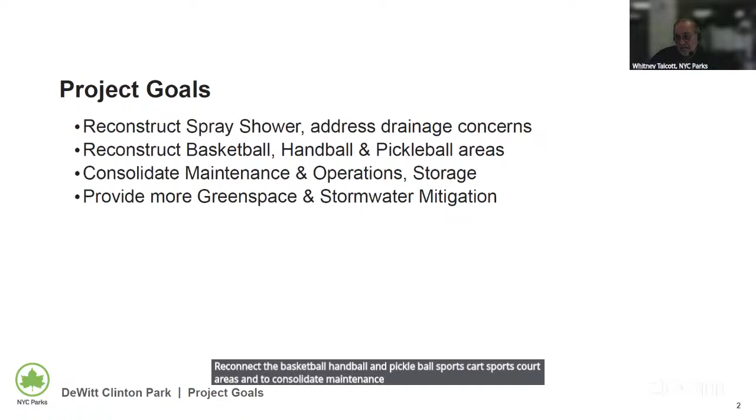So we had a community input meeting, and we talked to the parks management, and also listened to the people voicing their opinions. The four most prominent goals we came up with were: reconstruct the spray shower, address drainage concerns, reconstruct the basketball, handball, and pickleball sports court areas, and consolidate maintenance, operations, and storage in the park — since this is a hub for a bunch of parks in the region — and provide more green space and stormwater mitigation for the park.

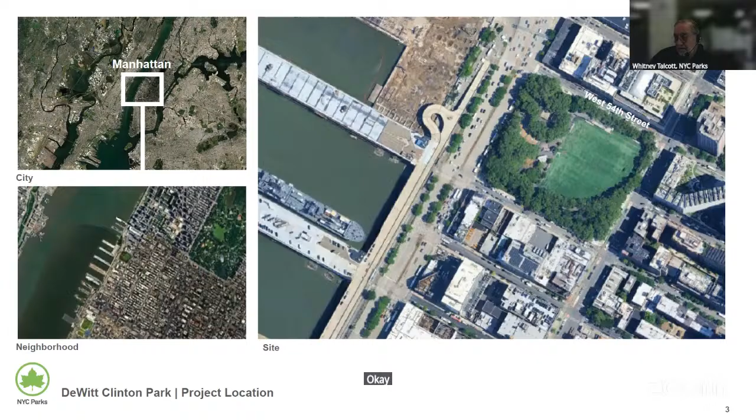So here we are on the west side near the Hudson River — a beautiful spot, one of the largest parks in the district. It has sports fields and sports courts that get a lot of activity.

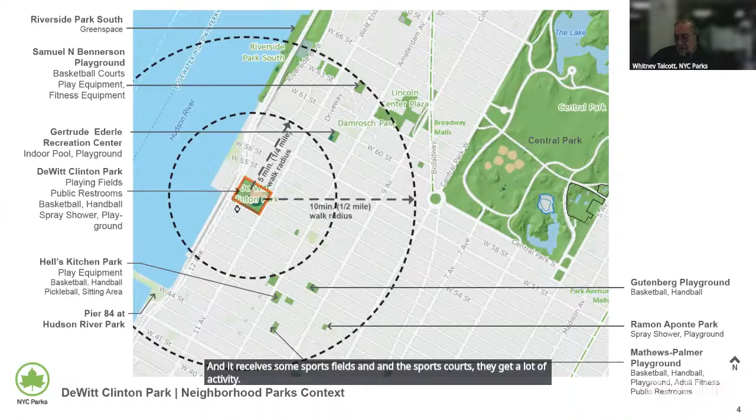This is a depiction of our project area, coming in from 11th Avenue. People and parks vehicles enter this way, and then there's a large area that's almost entirely paved in the back, overlooking the river.

Existing condition — are you aware that the cruise terminal folks are talking about putting a footbridge at the southern end of the park? Very preliminary discussions. Maybe it's baked into their designs? We're discussing with them right now, but it's too early to discuss in public. Also, this doesn't impact our project because this is the northern side, so that bridge will be part of something else — thankfully, the two projects aren't related. It won't touch our property, right? No, the footbridge might, but not the area of your project. It's too early to talk about any impacts of that bridge — we know nothing about it yet. Okay, well, that's interesting.

Okay, so here we have existing conditions. You can see this area is almost entirely paved — we've got basketball courts, pickleball courts, handball courts, and a spray shower. One thing we'd want to do with the spray shower is move it over, closer to the playground, which would enable us to have a bigger picnic table area.

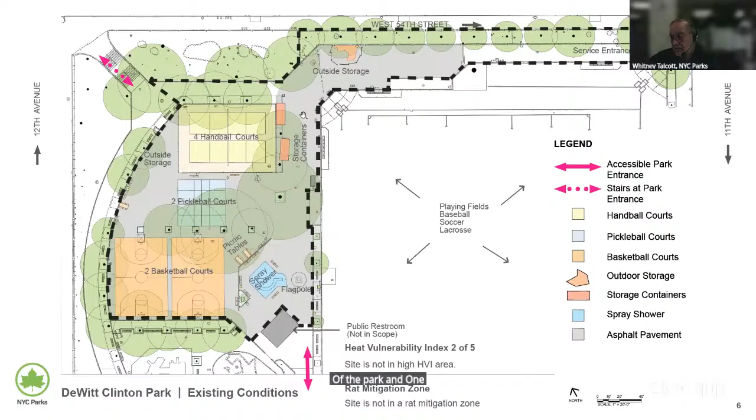You can see here we've got 3 different areas where outside storage is being put in by the M&O of the park, and one of our goals is to consolidate that. So here we have a little site analysis — we have the storage containers in a deteriorating condition.

We have outside storage in an area which we might figure out how to put something else into. It's taking up valuable park space. Pickleball courts are lined up on the pavement, but they're not being used because there's just too much pavement heaving and overhanging limbs there to make them really playable.

Same things are happening with the basketball courts. They are uneven, and the pavement is broken, so it makes it difficult to play a serious game. But there are a lot of people shooting hoops on the backboards.

The spray shower is a little bit old and needs updating. It has these great frogs. We'll show you the frogs in a minute.

The flagpole is in the middle of the circulation route, and we think if we remove that, we can have better circulation to this park.

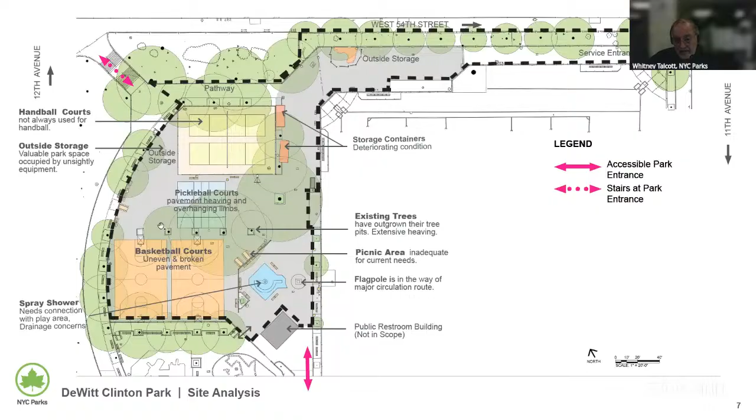The existing trees, you can see there's a lot of trees here. They're about 85 years old, and all of them are in these tiny little tree pits, which really inhibit their growth and make them want to reach out with their roots underneath the pavement looking for water. So we can do better here.

We actually surveyed every tree to make sure what condition it was in and what type it was. Our arborists have submitted a report for us, so we can tell what we can and cannot do near the trees. The tree canopy coverage is about 74%, which will make it really difficult to install any kind of solar panels in this area, because there's just no sun that we can tap.

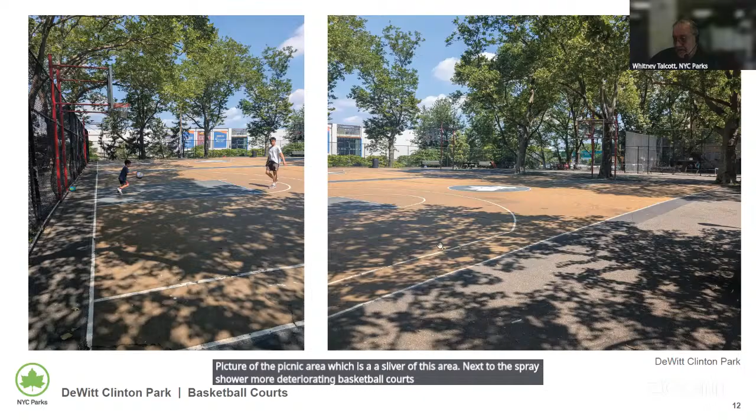More deteriorating basketball courts with the color seal coming off. Some deteriorating storage containers, another storage area. This is looking down the entrance driveway. And this is the area in back of the handball courts, which is used for storage.

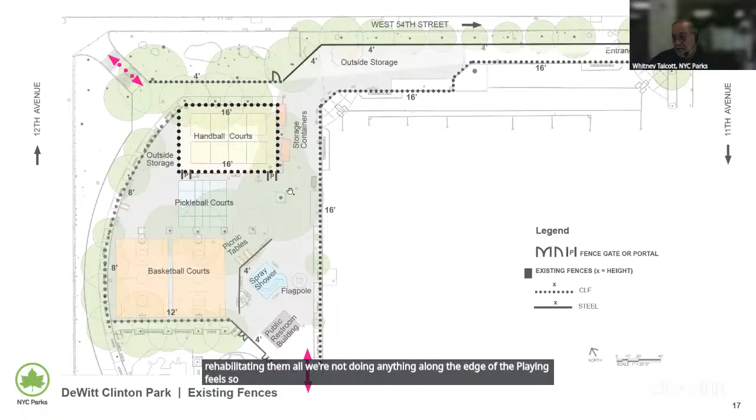Existing fences are mostly chain link fence. We're going to be replacing or rehabilitating them all. We're not doing anything along the edge of the playing fields though. Everything that we're doing is inside our project area, but not the 16-foot large playing field fences.

The new fence arrangement is like this. We have a metal screen fence in the storage and M&O area. We're going to rehabilitate all the fencing around the handball courts and along the perimeter overlooking this walkway that goes up kind of a promenade area, and also the fence is close right up against the playground. And then also we have little 1 foot high garden fence around all the planters so that hopefully we won't get too many dogs in there.

We can always hope, right?

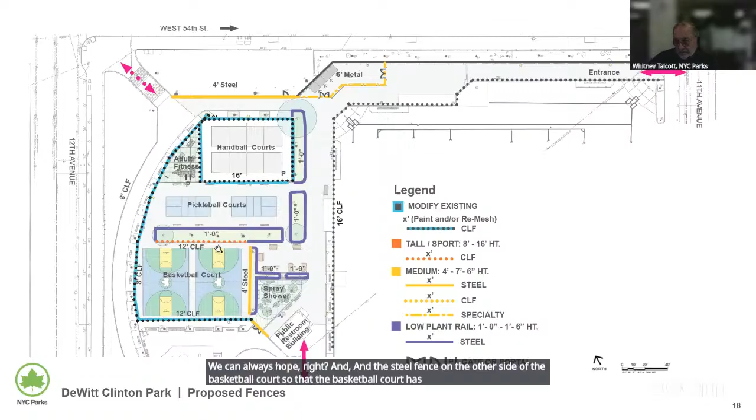And a steel fence on the other side of the basketball court so that the basketball court has is entirely surrounded by fences.

So here we go with an enlargement of the adult exercise area. It's going to have a safety surface, marbled safety surface on the ground. And we have, I think, one unit here. This big unit is a combination unit. It's got about 10 different kinds of exercise you can use it for. And then we have other more accessible equipment.

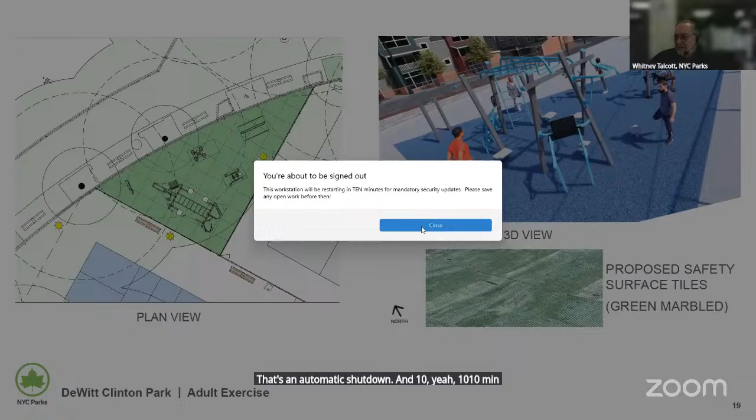I'm about to lose my computer here. There's an automatic shutdown. Oh, that's on your end? Yeah, 10 minutes. Okay, so I got 10 more minutes here. You could always email it. We could back you up, Whitney. Yeah, I emailed it to you. Okay, I'll get it ready just in case. Okay, yeah, don't worry. Anyway, so...

This is the adult exercise area with handicap access. Here's this spray shower. We have lily pads in a pond, and we have more different kinds of sprays than we had before. We have ground sprays. We have upright leaf sprays that drip down on you. And we've taken the old frogs and put them on the lily pads in a similar configuration to where they were, but they're repurposed and reactivated.

So we'll have all 3 different kinds of sprays, and we'll also have a connection with the playground. As you can see, this is a new gate. We moved the gate basically, and it's on colored concrete, so you can see which way you're supposed to be going. We also have a little concrete bridge, think mini Giverny, between the picnic area and the spray shower. And you can see the bottle filler and drinking fountain here.

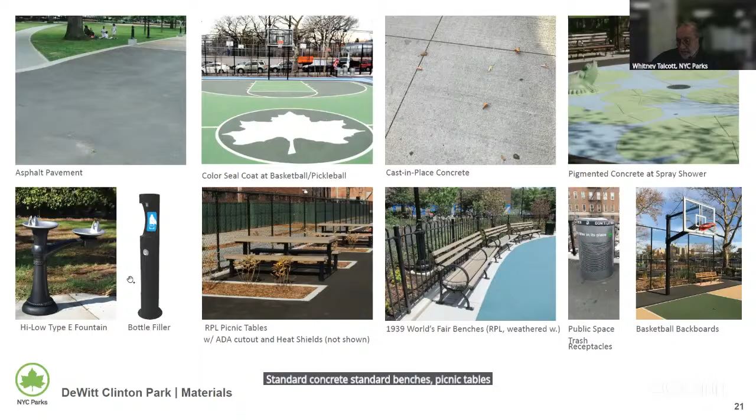Standard park equipment here, standard colors, standard concrete, standard benches, picnic tables, a bottle filler and fountain. This is a depiction of the storage container. We have new trash enclosures also being put out by the gate, which are the new standard trash enclosure, steel trash enclosure I believe it is. Here's a depiction of the...

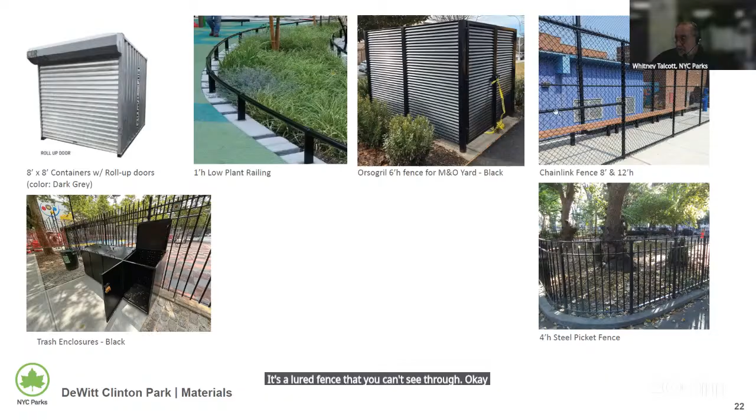Garden fence. All of the curbs are going to be flush curbs, so the water can drain right into the planter areas. This is the metal fence around the M&O yard. It's called Orsogril, a louvered fence that you can't see through. Then picket fence and chain link fence.

Some colorful grasses and small trees that we're putting in. And as for sustainability, which I know you're concerned with, we are adding 10% permeability, whereas right now we have less than 1%. The practices are to improve tree health and growing conditions by adding root growth areas - that's the planters. We're reducing stormwater runoff by directing water to new planting beds and detention areas, preserving the existing tree canopy, planting 5 new trees, using RPL lumber instead of wood. For existing materials, we're reusing the cobblestone blocks as curbs. And water conservation by on-demand activation of the spray shower in the spray shower area, so it's not all going at the same time, but going in sequence.

So there we have it. And I invite any discussion or comments that you might have.

This is first off, very much enjoyed the presentation as well as the design. Really excited by the addition of, I guess, permeable green space and what that ultimately does for the park. I guess in places where we've had areas of vegetation and soil, there are sometimes problems with rats, and I was wondering if there are mitigations undertaken when Parks installs these newer permeable green areas with soil to prevent rat burrows.

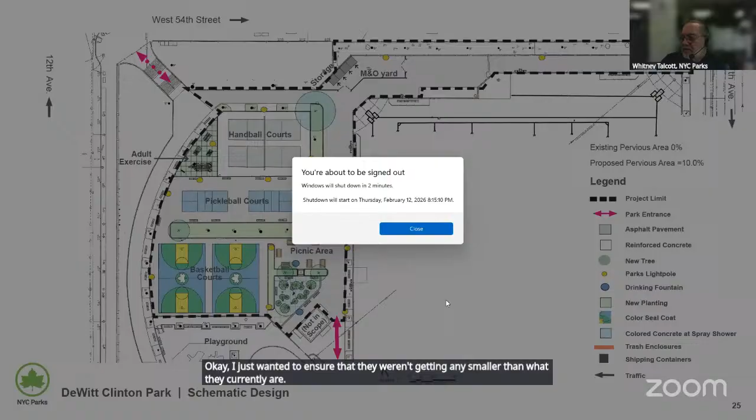Two minutes, I've got two minutes. Two-minute warning here. Why don't you let me just share my screen so you don't have to worry about it? Is that okay? Okay, okay.

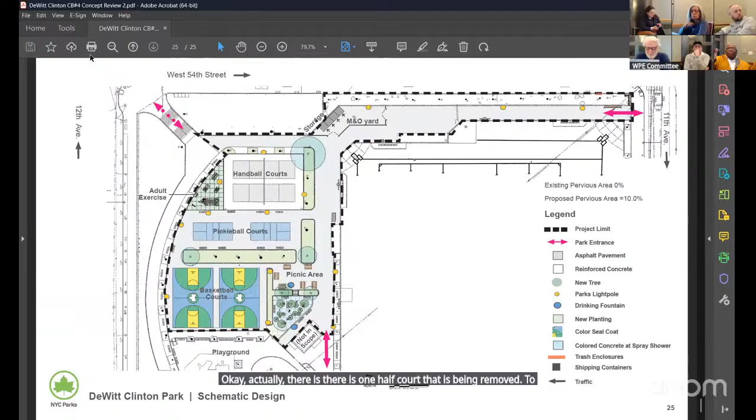So the size of the courts are remaining the same, but you're taking away two courts? No, there were always two courts before, and there are two courts now. Oh, okay. Actually, there is one half court that is being removed to better accommodate the pickleball play. Okay, so there is, and the other two courts are staying. So we could say two and a half. Right, okay, okay, thanks Paul.

And Whitney, could I ask a naive question? Thank you again for your presentation, I enjoyed seeing it the first time you presented to us. This is naive, but how difficult is it to redefine what the project limit is? One of the things we had talked about previously is that if you're looking at the baseball fields from that northwest corner, and follow down the foul line, there's a setback that occurs a little to the right - keep going, right there - you see where it drops back at a 45-degree angle and continues due east. If you were able to redefine the project area, because I know this park very well, you could gain an incredible amount of storage space that you could add to the current limits you have right now. I just don't know if that's a feasible suggestion based on what Parks has to go through to change the scope of the project.

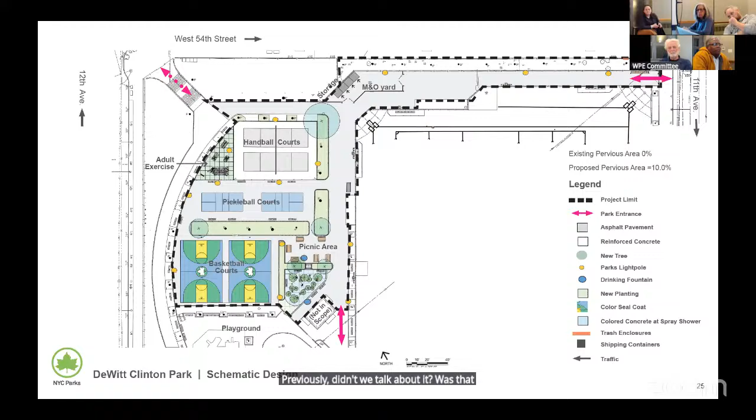Didn't you raise that once before, Jeffrey? It seems we talked about that. I'm sorry, Sally, what did you say? I couldn't hear you, I thought we talked about that at one time. I think I remember you raising it because it was such a good point previously. Didn't we talk about it, or is that something else? No, we did talk about it, but it was merely a suggestion at that point without having any appreciation of whether it's reasonable to say, could you expand the project scope beyond the currently defined boundaries? As far as the bureaucracy is concerned of what filings that would take, maybe it's not a feasible suggestion.

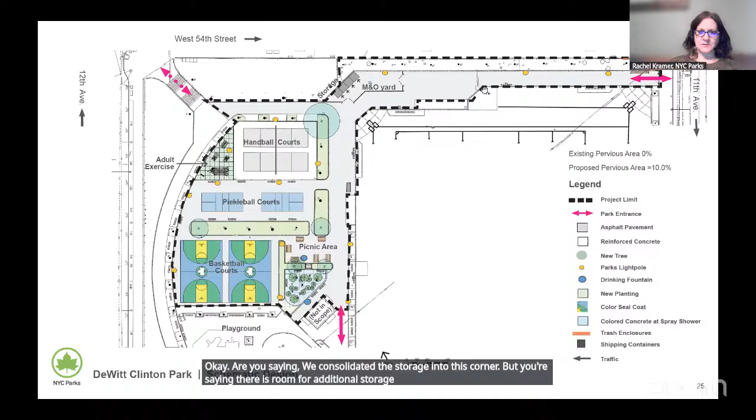Are you saying M&O storage? Because we consolidated the storage into this corner, but you're saying there's room for additional storage here? Oh yeah, so this is not a criticism of the consolidation plan that you guys have created so far.

I'm just saying, knowing how space is very, very tight, every park that you guys manage, there is a dead spot, effectively 15 feet deep and 30 feet long, that could be reclaimed if needed. And it's not circulation or part of the field? Or tree lined? It is not tree lined. It's not part of the active play surface, and it's never used. It's just kind of empty. And that's independent of what sport is being played on the field.

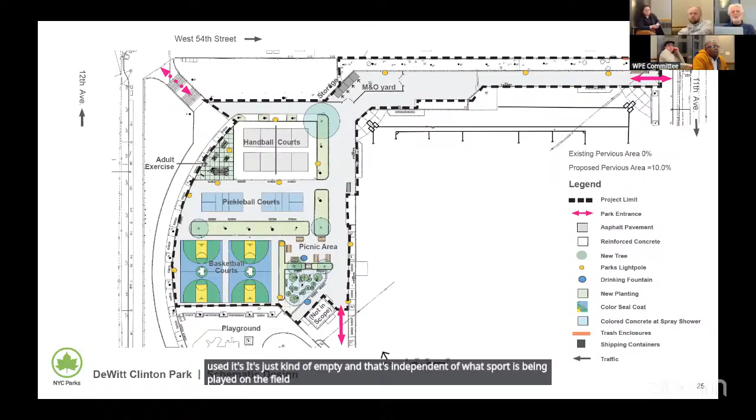Jeffrey, can you guide her to where to put the cursor? I'm gonna try to find it in the aerial. That hand right there is exactly where it starts. This area, along this fence and then going down this way? Yeah, exactly this area here? I'd be happy to meet you guys at the park and show you. Are you referring to this area over here? Yes, exactly, that's behind the 16-foot fence.

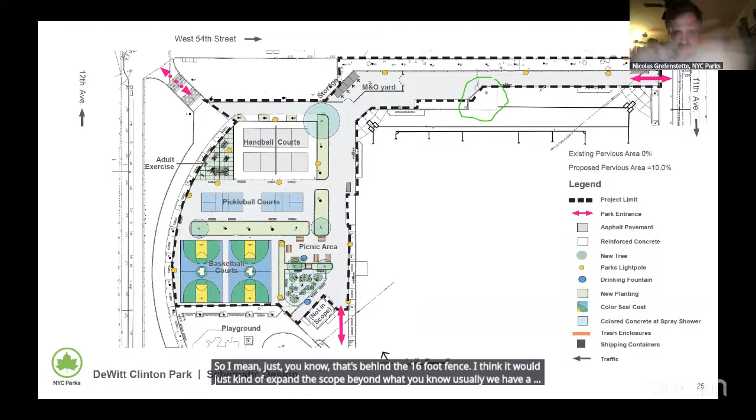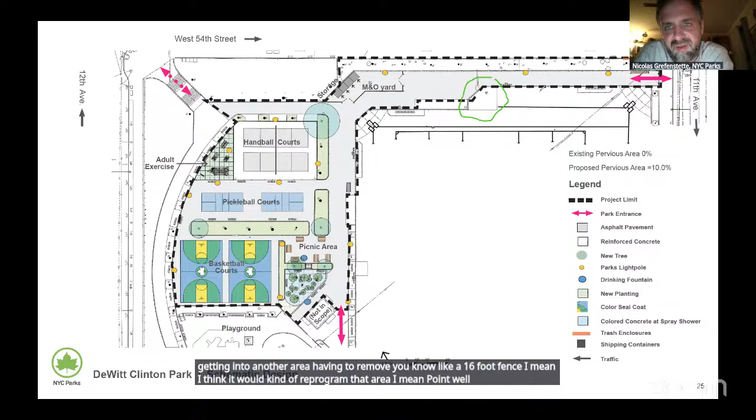I think it would expand the scope beyond what our usual budget allows. To your question earlier about the project limit line, it's determined at the onset when we get the budget, say $6 million for example, and we define the scope of what we can do. So once we start getting into another area, having to remove a 16-foot fence, I think it would reprogram that area. But point well taken, this area might not be used to the best of its ability.

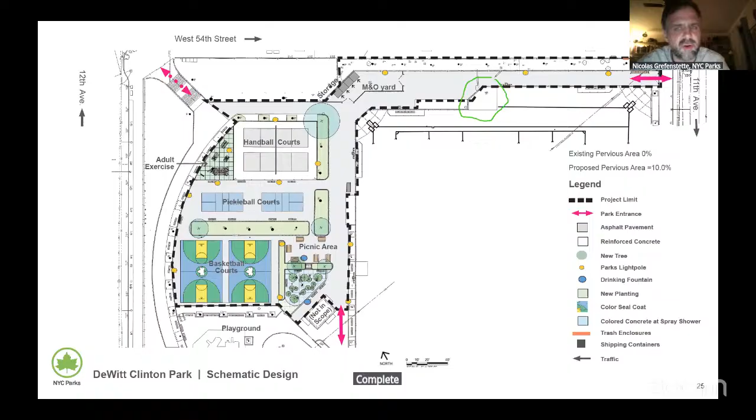Is there no spray shower in this area right now, or like a misting post? No, but people view sports from there. There's a concrete pad. I think there's a bubbler or a drinking fountain there. Isn't there a drinking fountain over there?

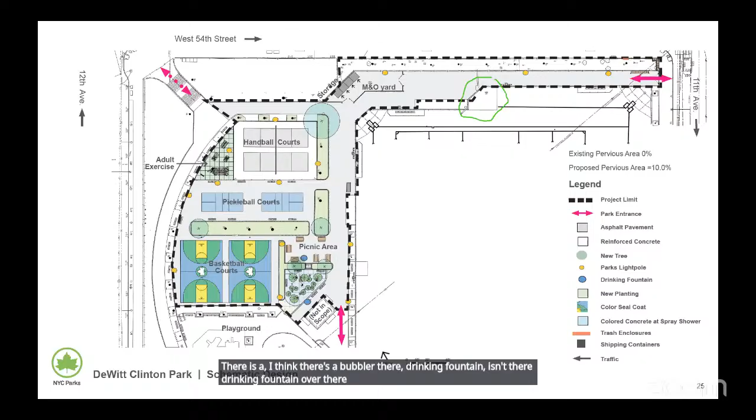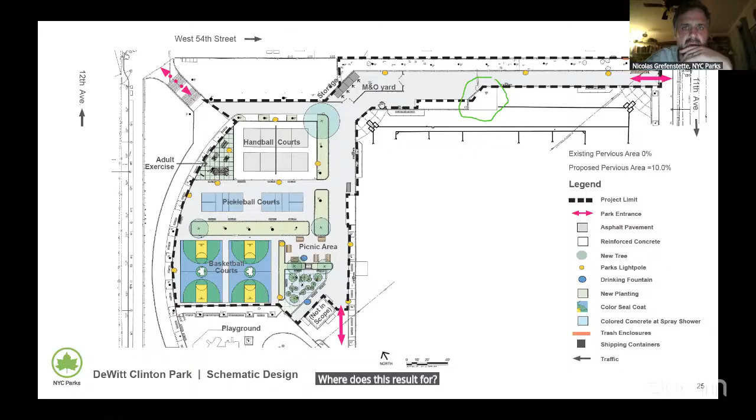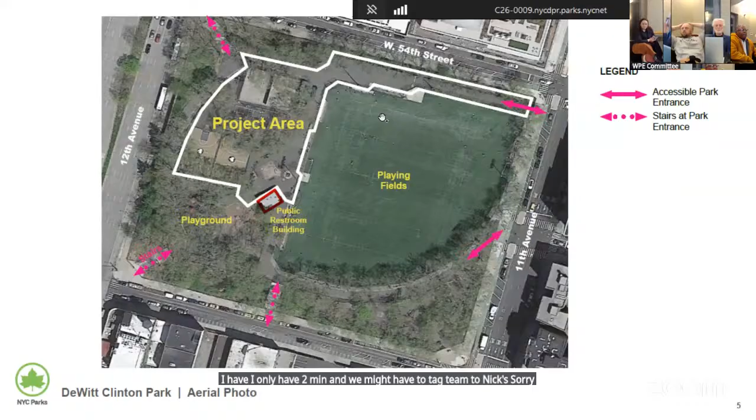Can we pull up the aerial view, please? Oh, do you not see it? What is this resolved for? You don't see my screen? No, I just see where they're circling. Oh, there we go. We see it now, Rachel, I'm sorry. Do you see it now? Yes, I only have 2 minutes. We might have to tag team this. Sorry, I don't know what's going on. I'm back, I'm back. Oh then I'm gonna stop sharing.

How do I do that? Well, I have to bring up my screen.

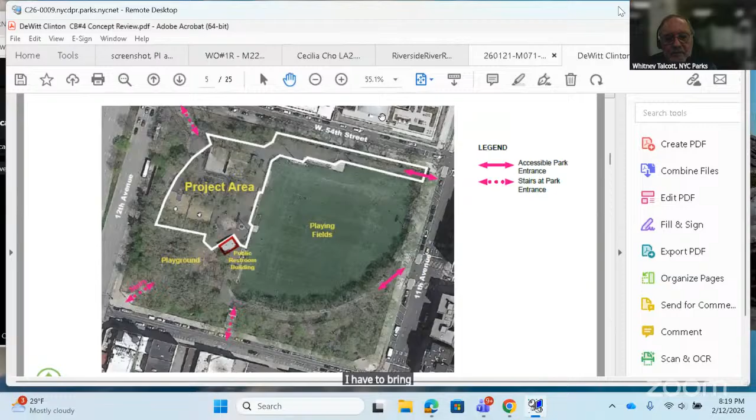I don't want to sidetrack the meeting. If it's out of scope, it's out of scope. It's just maybe something for consideration if the next phase of DeWitt Clinton rehabilitation takes place. Maybe go ahead and pin that for consideration and redesign. Yeah Jeffrey, I think it's good to note right now, but we can't expand the scope right now. We're already at the limit for the project budget, so we should leave it at that for this project. But when we talk about the field in the future, we should definitely bring this up.

Sally? My question was actually earlier, are we still on permeable? Because the numbers we discussed, you said we were now at less than 1% and going to 10%, and I don't really understand, is there a norm? What does 10% represent?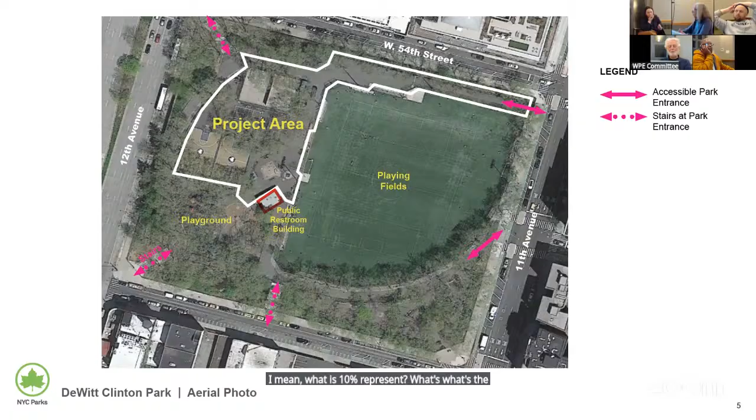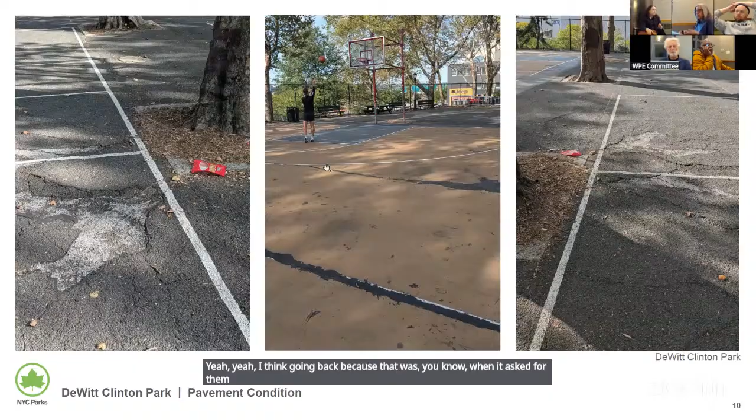What's the typical? Do you want to go to the sustainability slide, Whitney? Sure, yeah, I'm just going back because that was an announcement that we were going from less than 1 to 10, and I'm not sure what that means. Is 10% good? Is 20% better? It's a lot, where we should be? Well, it's a lot better. The question was why only 10%? No, is 10%, I wanna know, is 10% good? It's better, but is it good, or should we be at 20%, or 50%? The number doesn't mean anything to me isolated like that.

Yeah, it is pretty good, and especially good for this park because we still want to play sports on courts, and that we don't have. There's not a whole lot more we could do here to make it more permeable. So your capacity in terms of what makes sense for this size. These things are basically best management practice, where we've gotten a good number of square feet of permeable area. That includes thinking about permeable pavers for the walkways?

Which walkways? You talked about circulation areas before. I don't know if we can—you have a whole storage area that could probably not be concrete, but be some kind of gravel. The thing is that for vehicle use, we need to use pavement, since it can withstand the traffic.

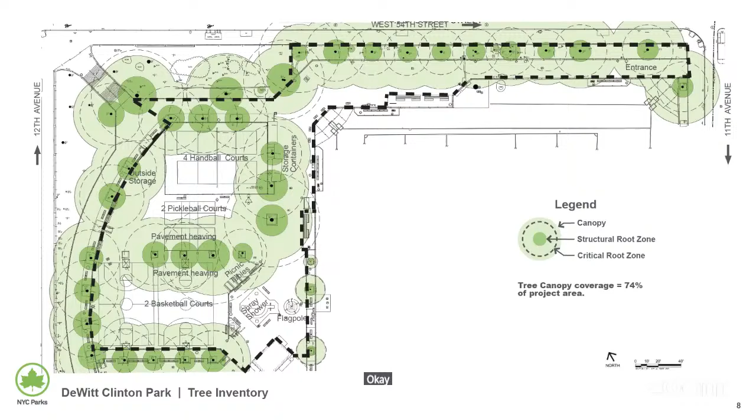See all that area that faces the big open part of the play field? That's plenty of room to have light come in to hit a solar panel to run some power. It just galls this board that we can't get one. Can we get a prototype? Just one. It's beyond my scope to understand that we can't get one.

That's my last request. We are piloting the solar panel, the solar lights at East River Park. Just to note that they're still attached to the system, because if they fail, we still are mandated to secure the site with lighting. So if we have a pilot program, it's not a standard, and those lights are attached to the electrical system so that they do receive power if for some reason in the future they don't work.

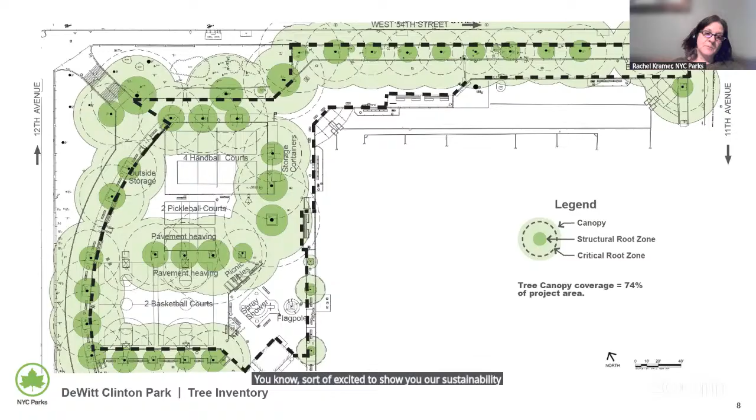Yes, of course. Of course. But just since this is the environmental group, we were sort of excited to show you our sustainability slide. So where we couldn't do the solar lighting, Whitney, if you don't mind going to the sustainability slide, we feel like we're doing a lot of green infrastructure, reusing of materials, increasing the health of the trees, making more permeable spaces. And then, as per DEP, all the water in this site, because of its size and the amount of disturbance and construction, we're going to be storing the water on the site so it doesn't burden the adjacent systems. So that's another component, another scope element that we're including at this site. Hopefully that's helpful, we just wanted to share this information.

You got to be really clear that this committee is really pleased with this slide and the work that you have done to increase the sustainability. Brad shouldn't be faulted for not praising you greatly for this slide, but that doesn't mean that folks like Brad and I don't push for more. And we want to encourage you to look at every opportunity to increase the use of solar, the increase of use of permeability, the increase of use of native plants, all the stuff that we always hit. This slide is a victory for us as far as we're concerned, but we continue, and Brad is one of the best members in this committee to do this kind of stuff.

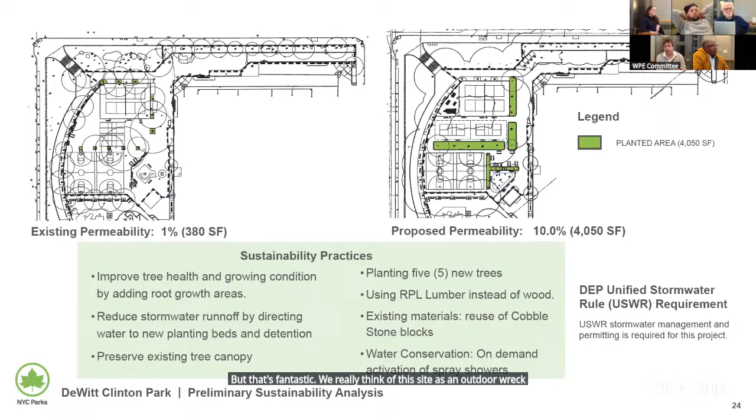Yeah, I just wanted to say something about the pickleball.

These pickleball courts would be too large to go north-south. We're not showing the dotted line that goes around these pickleball courts, which is the actual play area where people go outside and still try to hit the ball because of the bounce. Pickleball is like a big version of ping pong, and people use the area just like it's 20 feet in back of the pickleball or ping pong table. So we can't really push north or south here.

The planter area here, we can't even push into that because it encompasses a lot of the root heaving area, and the landscape construction arborists won't let us go in there with new pavement. We're kind of under the gun with that. So this planter area is a tree area, so we can't push in there. We're not going to be able to make them north-south, because then we wouldn't have enough space.

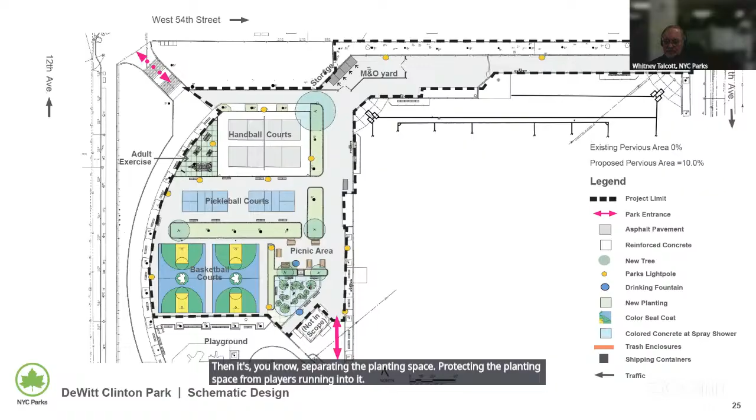Yeah, benches are also something to run into, so we have to watch out for that too. True, but if the benches line up right at the edge of the planting space, then it's separating and protecting the planting space from players running into it. We do have a fence in there also to keep the balls out of the picnic area and the spray shower.

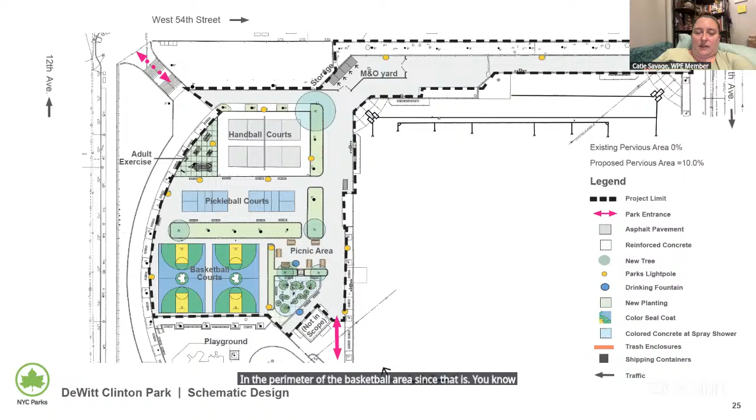It's fine. I just think we should think about having some sort of seating in the perimeter of the basketball area, since that is used for leagues. Yeah, I think there's enough room on that edge right there, still well clear, like 5 feet clear of the basketball court. That's a good idea. It is.

Anything else? Just timing, when do you anticipate breaking ground and all of that good stuff? Well, imagine you have to finish the design first. Yeah, the construction drawings should be done by this summer. And then we'd be going into procurement, and construction would start maybe a year from this fall.

Okay, how much change in this design is going to result as a result of this conversation? Well, I don't think we can move the pickleball courts. That's I mean, we can put some more benches in. I think that's kind of an easy approach here. We can put some more benches in there.

This will evolve slightly because we haven't done site testing yet. We do expect that the engineering on the site will result in some detention areas being put in. I don't know if that'll change the sports courts orientation or move anything, but there could be some minor changes when we have that designed. Detention areas are areas that capture stormwater and release it.

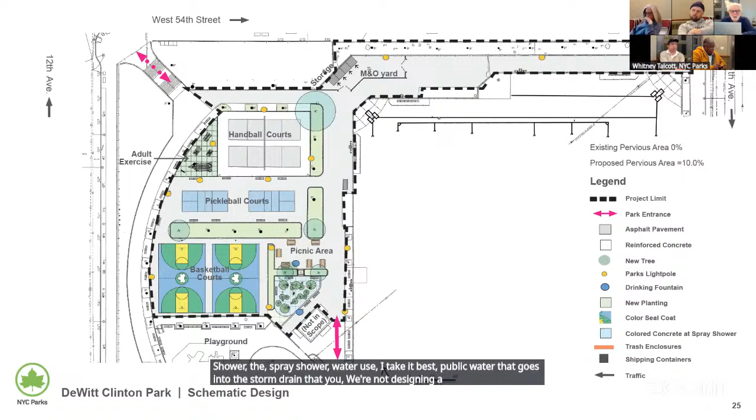We're really pleased about the rat control. We didn't say anything about the spray shower water use. I take it that's public water that goes into the storm drain, you're not designing a reuse system? No, but there are citywide standards on how big the spray shower can be, and we're adhering to them. And it definitely goes into a sanitary line, not a storm line. Right, it'll go into the sanitary sewer.

It has a separate capture, DEP certification about that. I'm not sure what you just said, it doesn't go into the city's stormwater system, sewage system? It goes into a specific sanitary line. It's considered soiled water after, it's meant for humans, kids to play in it. So it has, as per DEP, yes, it goes into the combined stormwater sewage.

I'm changing your words, but I don't think I'm changing your meaning. It goes into this, where my sink water goes, into the stormwater sewage system. Right, it'll go into the sewage treatment plant if it doesn't rain too hard. Shower use, you said something about controlling its start and stop, that it's not on all the time, which I thought was a great addition.

The basketball courts remain junior courts, but there was a suggestion of putting junior rims in the middle of the courts. Hold on, the rims are the same, I just want to correct this from before. The backstops of the rims are the same no matter what court we use, unless we do a really specific child court, which we're not doing here. These courts, the horizontal dimension and the vertical, 10-foot hoops, yeah exactly, the horizontal and vertical dimensions are different. That's what we're talking about by junior. The actual backstop of the rims is the exact same.

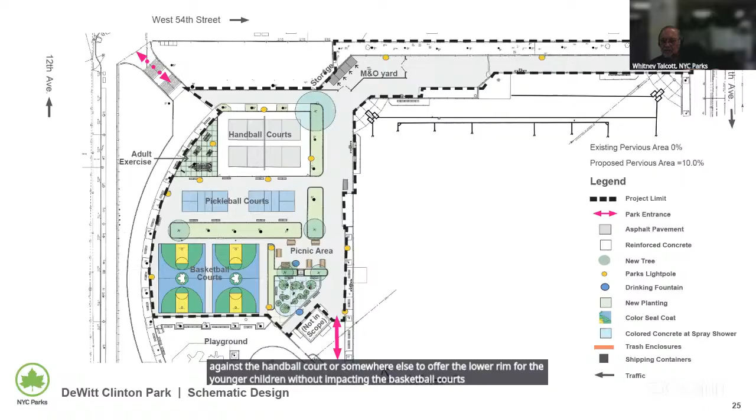I think that's a great suggestion to put in the letter. You're just hearing it said now, and there's no way we're trying to specify what you're doing. We're just raising questions.

Please go ahead, perhaps this is a stupid question. I am not the correct person to ask, but do the children want this? Is anyone actually asking for this, or are we just dividing the will of the community?

There are a lot of young kids that play basketball. We see them at Mathews-Palmer, now that court is open, and a lot of kids shoot hoops at Hell's Kitchen Park. Most younger kids are used to using the regular size hoop. I don't recall, was there previously a shorter one, or was it always the standard size in the current configuration?

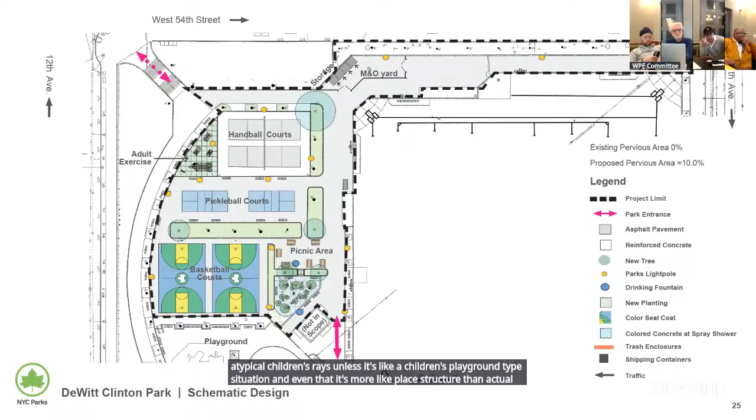They should be all standard size. Just to clarify, we don't really use those atypical children's rims unless it's a children's playground situation, and even then it's more like a play structure than an actual sport feature. On regular asphalt, we always use the same standard rim and standard backstop, which is what will happen here. So it makes sense to just follow the standard.

I think the letter is only going to state concerns and suggestions. It's not going to say we demand. That's not the idea. You guys can say whatever you want, Marty, but everything we've said tonight, we don't want. They've said no, so that's what I heard.

Sorry, Brad, can you repeat yourself? The room got a little... Brad, I didn't hear you. I know you said something. Is that what you're saying? Yeah, I'm going to drop it. Never mind, excuse me. I think he said never mind.

And then there were some comments about benches. So the letter would say: thank you for the presentation, fabulous design, here are some concerns, would you please consider these.

We don't have quorum, so I can only ask the room and those online if anyone disagrees with what I just said, and I will bring this letter to the executive committee.

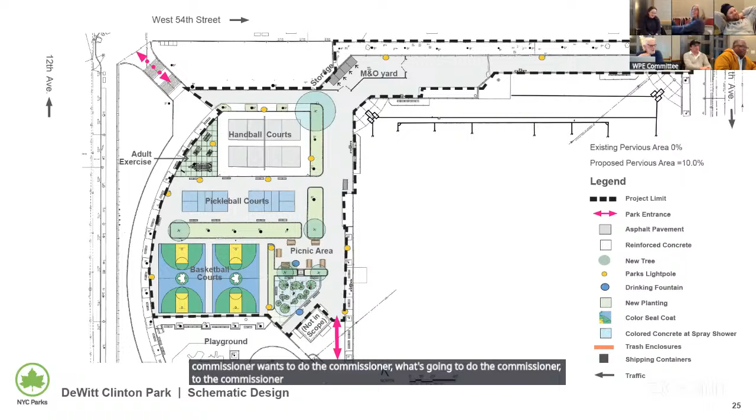Just to clarify, the letter should be addressed to the Public Design Commission. Could we also CC Parks? You can address it to Parks, and you'll also bring it to the Public Design Commission. Who do I address it to, Max? You can address it to really anyone you want at Parks — Steve Simon, Rachel, or a commissioner. Most people address the commissioner; we much prefer that. All right, we'll send it to Paul, the commissioner, if you can.

Hey Marty, Marty and Catie, the only thing I'd add is that this particular park was a unique opportunity where Parks came to us and said, we've got a cool opportunity to redesign this park with community feedback. I'd recommend they be recognized for living up to that commitment. If we could memorialize in the letter that we appreciate Parks' cooperation and feedback from the community, and view this as a model for redesigning parks in the future, that would be a great addition to the letter.

Sorry, I didn't capture all your words — you wrote part of the letter there, but I'll get some of that. I think you're absolutely right, Jeffrey.

This is the second letter to the executive committee. Anything else from Parks? The Rose Garden is fine. I beg your pardon — the strip, we can talk about that.

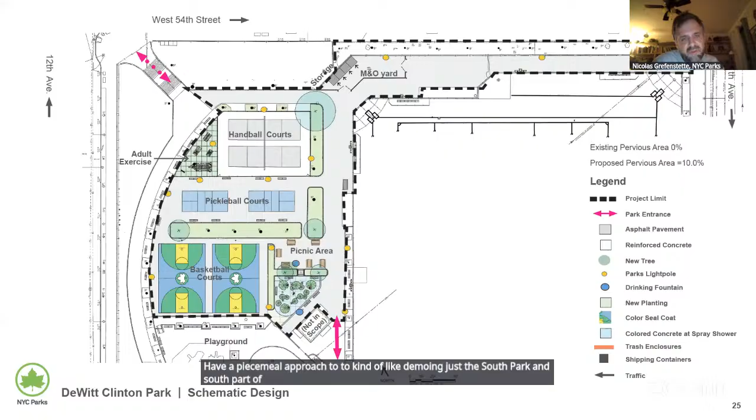But just looking at the scale of the park right now, I don't think it would be advisable to take a piecemeal approach, demoing just the south part of the park and then the north. But it's definitely something we do for very large parks when we need to keep part of the operation going.

We will also look at safety and circulation, because we don't want to make dead ends or dangerous places. The way that people access the field, we'll take a good look at that, so we don't hinder circulation to the field, the playground, and the stairs. We will take a close look at that.

Thank you. I guess just highlighting that it sounds like there may be a very significant recreational area out of commission for a significant period of time, and there may be community concerns about that. Not to say it needs to be phased or can't be phased, but that will inevitably be part of the concern, which I understand is necessary if you want these things improved, but I'm sure it will come up from others.

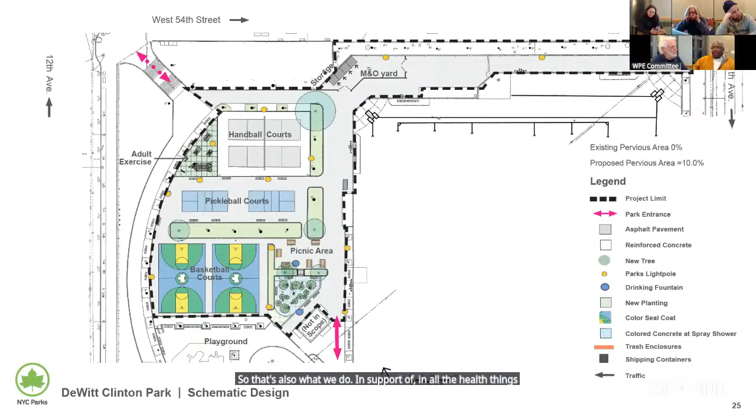Yes, it actually, I don't want to say it caught us sleeping, but we had scheduled, we were expecting it to begin around noon on that Sunday. And when I was leaving for work at 5 o'clock in the morning, I saw it start to come down. So it kind of got ahead of us. It wasn't light, fluffy, friendly snow, but that's how we get it done.

That's my report. That's good to know. So I have a question. Yes, so I don't know if it's coincidence, but Max, I haven't had any company at 2 AM for the last several days. Is that a coincidence or are we locking the fences again?

Chelsea Green. Oh, so yes, one of the issues with the snowstorm was that a lot of, after we got sidewalks cleared, a lot of the gates got frozen open. And as these crews have been going through, basically chipping in pathways, they've also been freeing up the gates.

So I assume from what you're describing that we've got it chipped open and they're being locked as they were. Well, during the period that I was writing to you guys, our particular fence was not frozen. I thought it was probably that you were doing other work and just weren't getting to locking the fences. But what that did to our park has allowed the dog lovers to come in at 2 AM and play with their dogs while they walked. So, again, hasn't been anybody in the last couple of days, but I don't know if that's because he has the flu or because you're locking the fences. Our fence was not frozen, it just was left open.

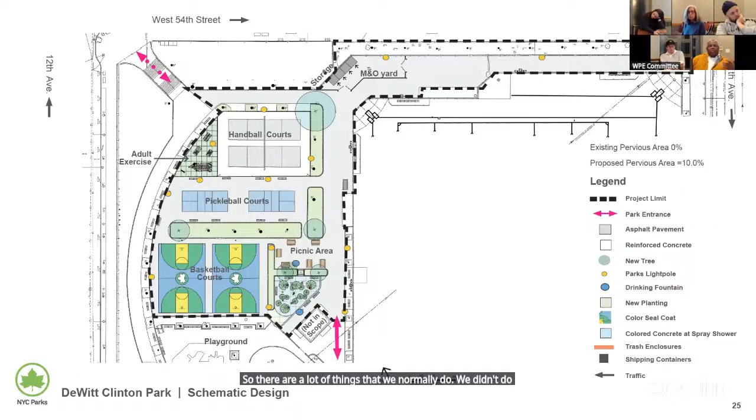A lot of things during the storm got put on pause. For example, a lot of bathrooms weren't open because, believe it or not, it was so cold, pipes were freezing. And even though we put up signs that say please close doors, keep heat in, general park users don't do that, so we just closed them up. As a matter of fact, we had a freezing situation over at Chelsea Park. So there are a lot of things we normally do that we didn't do, to focus on snow removal, either in the parks or as part of the citywide mobilization.

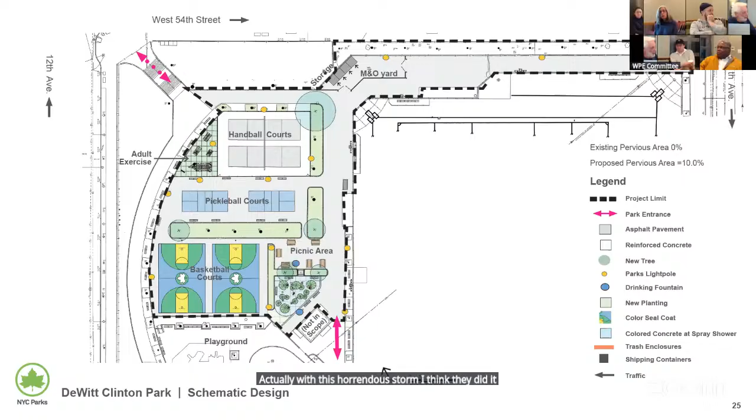There's been a lot of criticism of the new mayor and of the city, I'm quoting because I don't feel this way myself, for the poor job that they've done in snow removal. Actually, with this horrendous storm, I think they did a fabulous job. And it's nice to hear that, I mean, you're not supposed to say that on recorders.

And I'm glad to hear that you guys were involved. I think I'm sure you don't hear public statements of praise. I mean it as that. People do not understand what it takes to mobilize to keep the city running. They have a very narrow view of which agency does what, where in fact it's a lot of cooperation.

I think there were 6 agencies that responded to Ramon Aponte. We had DEP, we had DOB, we had Parks, we had OEM, we had NYPD, and we had DSNY, all for that one. It was a horrendous situation, but everybody has someone that they need to report on, account for, or assist with.

And people don't see that. They assume, well, it's snowing, so sanitation's out and they're salting the streets, or sanitation's plowing, but we plow also. So people just don't understand what it takes to get things done. The public information isn't that it's cross-agency cleaning, it should be actually. I agree with you. But I think, given how bad this snowstorm was, the city did a fabulous job, and that's just me.

We have another agenda item. No, we don't, Marty. What happened? So, should we initially talk about the park for a little longer? Initially Anna Sachs was supposed to talk about some sustainability stuff related to waste.

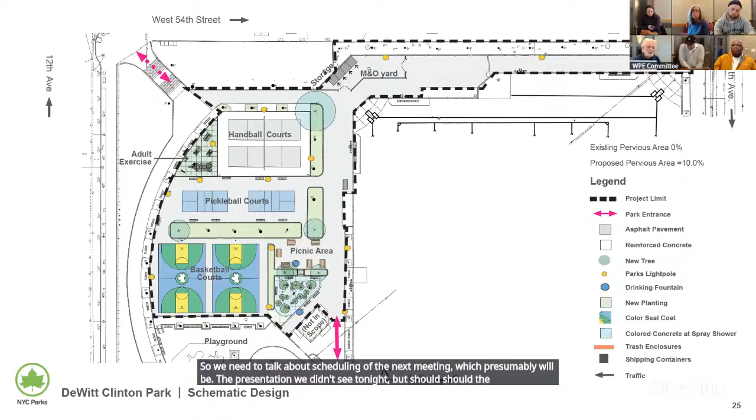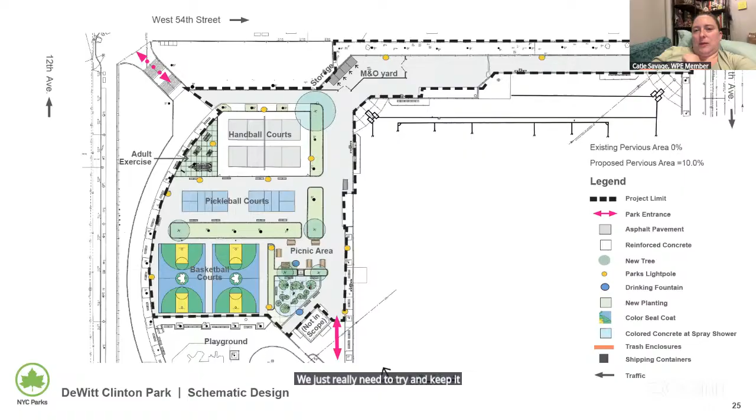So we need to talk about scheduling of the next meeting, which presumably will be the presentation we didn't see tonight. But should the Ramon Aponte Park come back up also? Yes, and I think that will be an update with Parks. We could potentially have Kelvin. We just really need to try and keep it down because there's a lot of stuff happening.

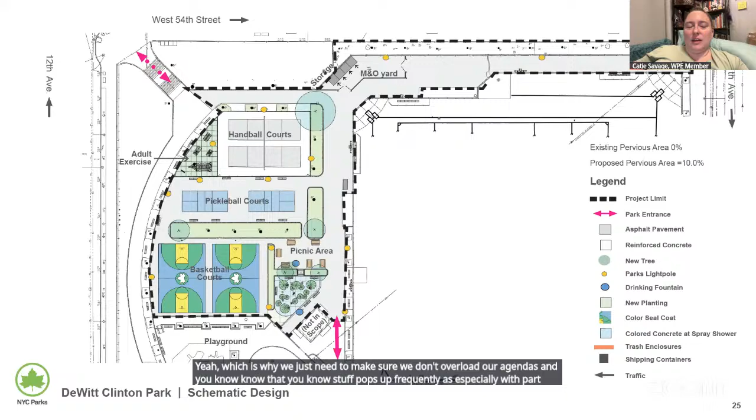So you and I and Janine need to talk, I want to be careful with our scheduling. I'm happy to say this to more than just you, Catie. We had a meeting last fall that lasted to 11 o'clock. It didn't make me happy, it didn't make anybody happy. Which is why we need to make sure we don't overload our agendas, knowing that stuff pops up frequently, especially with Parks and all the scaffolding. Stuff happens. We can set up a prep, Marty and Catie, to go over what's on the agenda next month. I think Brad has his hand up.

Go, Brad. Just to go back to DeWitt Clinton, you guys brought it up, and I know they said it was a non-issue, but maybe add to the letter about the transportation terminal and a possible connection. I just think we should at least make that note. The potential of a pedestrian bridge that connects.

I understand your point, Brad, but it's not in any way related to this specific part of the project. The proposed area would be closer to the 52nd Street side, which is not being renovated at this time. So I think that could be dealt with in the future.

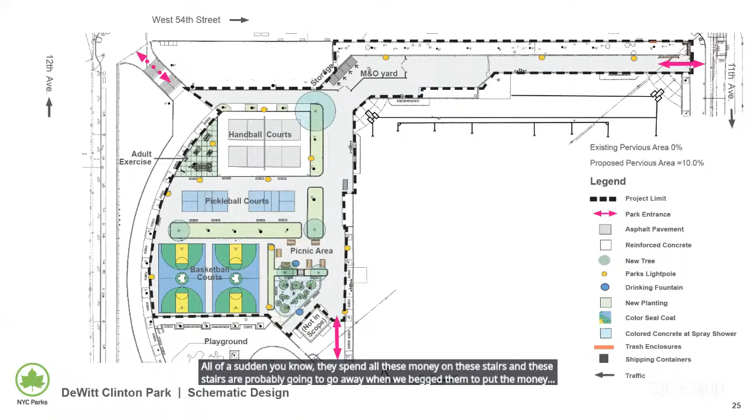I get what you're saying, Catie. I just would, as a suggestion, put it out there, because the architect Whitney had no idea about it, but Mike did. All I'm saying is it doesn't hurt to say please note that this is a possibility, because we've seen things change many times, as we know, Catie. All of a sudden they spent all this money on these stairs, and these stairs are probably going to go away when we begged them to put the money in the park. So I'm just saying it doesn't hurt to make the note.

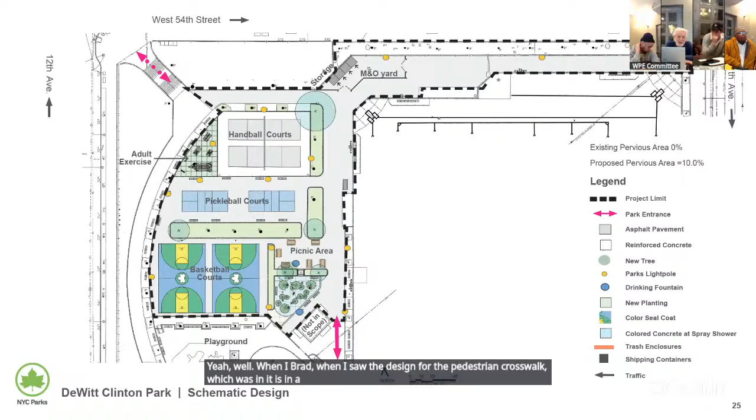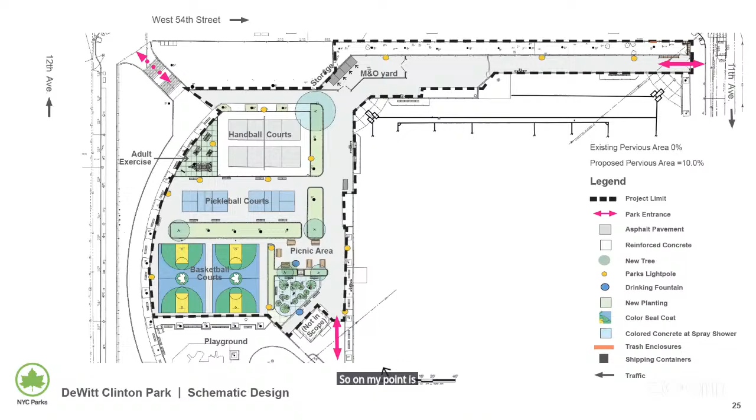Brad, when I saw the design for the pedestrian crosswalk, which is in a very preliminary state, which Max has been saying all along tonight, I was amazed because they designed it right over the $1 million steps that have just been renovated. I believe it was $12 million. Remember, Marty, we were astounded. It was an expensive renovation. So my point is just to maybe make the note, is all I'm suggesting. It doesn't hurt us, it's an important suggestion.

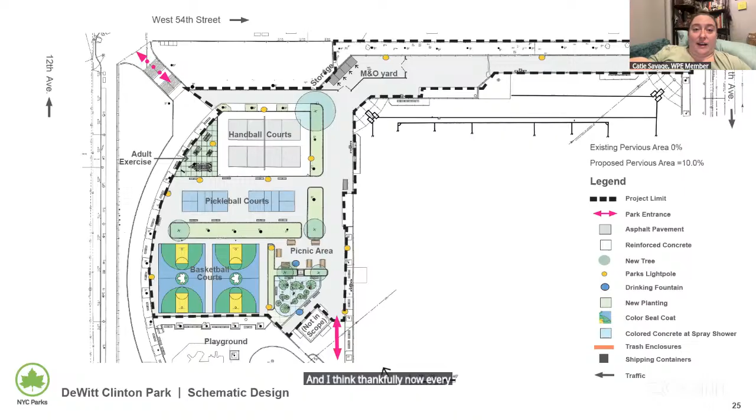I appreciate it, but I think it's too much of an aside for what this letter is trying to say, so with your permission I won't put that in. I think thankfully now everyone is aware, the people on this call from Parks now know about this a little bit more, and we'll keep bringing it up because it's going to come up. We've seen it in the presentations.

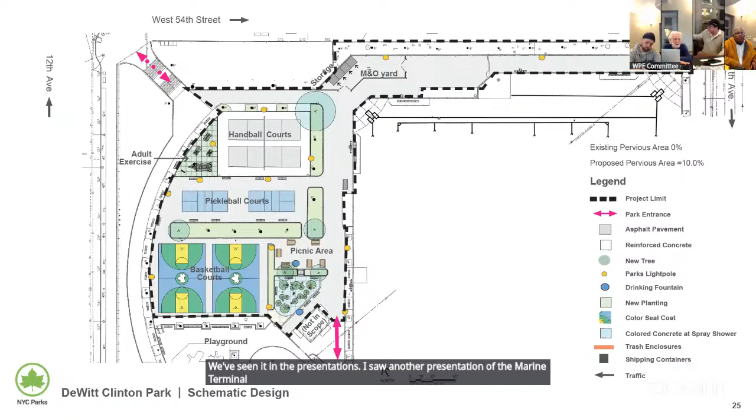I saw another presentation of the marine terminal at the Hudson River Park Advisory Committee, I think that's its name. They now have some money for shore power, which was nice to hear, but they're still not doing temporary power. And I raised that, Brad, and somebody criticized me for raising it, and I said no, I'm going to keep raising it. There should be temporary shore power if you bring the electricity over. But we're talking about something very different than DeWitt Clinton.